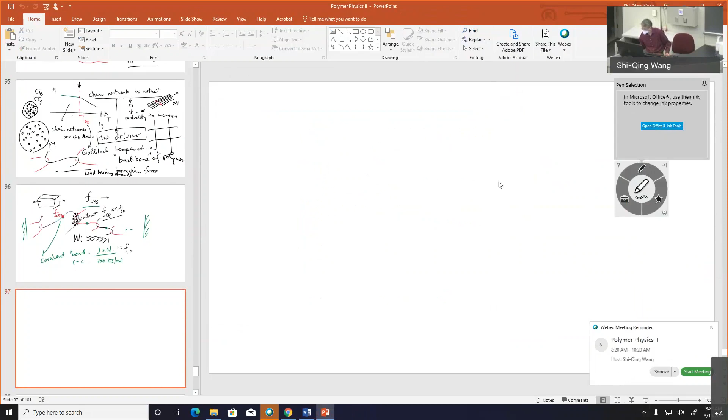Okay, here it comes. Let me review a little bit, or force you to have a sense of this. This is what you do: you grab your sample, you try to draw it at room temperature, which I mimic by bending, and whether you can succeed in achieving that deformation really depends on whether the soldiers, whether the chains inside, understand the command.

And this thing just goes on and on, right? Millions of them. So it looks utterly clear that the only way you can send your message through is if there is something that connects everywhere, over 1 million of such structures.

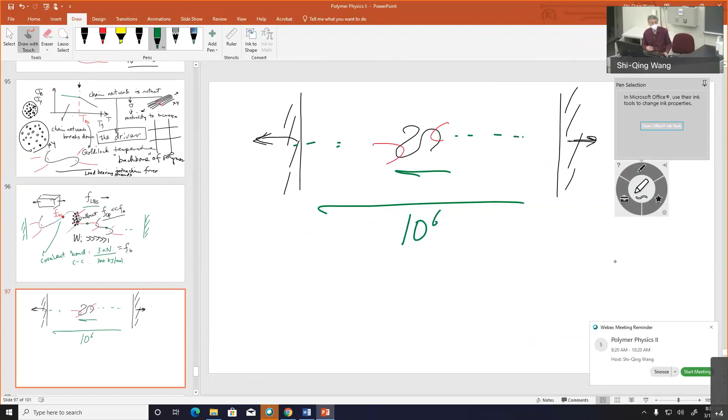So to the zeroth order, that seems to also be the way to think about what delivers the stress. If you really have something that eventually gives you higher mobility, R is mobility, and match the mobility with external rate, you need something that delivers this stress, and that stress presumably is this chain network.

And it's this backbone that can still, it's this backbone that is sending the message. So one way of thinking about this is this backbone is able to displace, and there is the possibility that this backbone, as it moves, it will bring about movement of the surroundings.

And there are millions of them now. They are all connected, not because the chain is several centimeters long, but rather because of uncrossability. They are all frozen, by the way, in this glassy state. So they have no way to escape. They get stuck there.

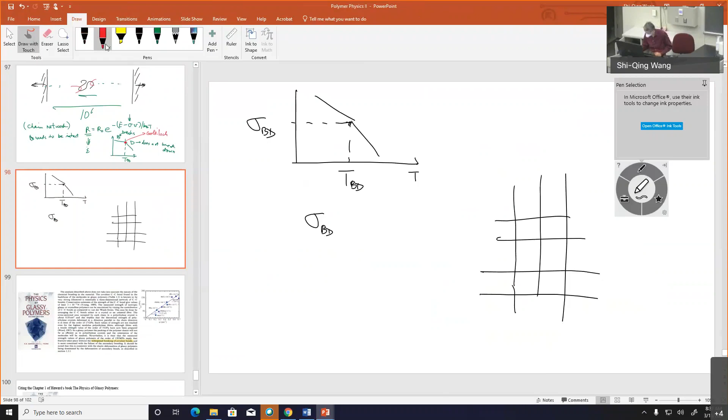And then we just recall what we know from the way we think about rheology. It's a network. It's a network in the sense, this is my network. Then I claim each of this. I use a straight line to describe that strand, but in reality, it's more like a Gaussian chain, right? Because there's no stretching. The chain just happily stays in a Gaussian coil form.

So if this is the network, all I need to ask is the area density. In other words, let me just establish the coordinate for you, x, y, z. If I look head on, in other words, if I look at the x, y plane, then I see these strands coming out to me. All these facing me are the red ones. They're coming out to me. I'm going to count them, how many per unit area, and denote this by this.

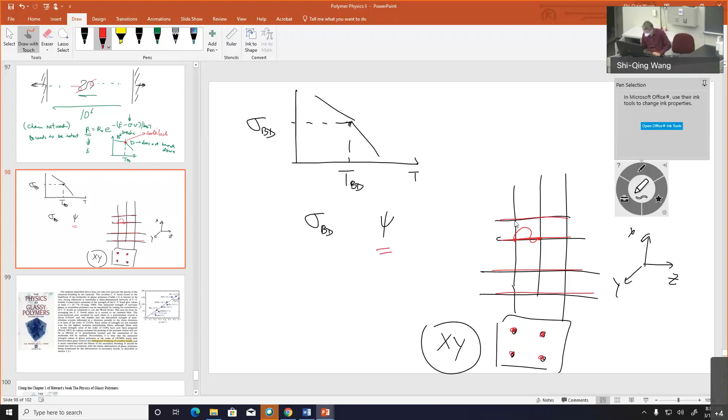Since this concept is established through the idea that you have chains explicitly establish a network through uncrossability, these points, the nature of these junctions, can be regarded as arising from this, right? This point is that point.

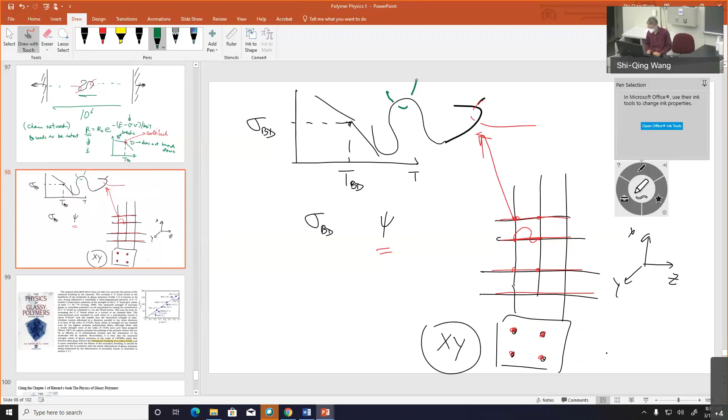And you can argue the only way this can occur is for this chain, changing my color here, is for this chain to fold back and forth so that there could be another one coming to grab me, right? Remember that? So the argument then is that this needs to be long enough for the red chain and the green chain to grab me.

And how long was it? We talked about it. You need to fold several times. I know this part, I just count on you to still remember a little bit, but you can always go back to the recording to find out where they are. And we claim, roughly speaking, maybe it needs to be this long.

How long is that? So in our new language, we will call this load-bearing strands. Then we're really trying to figure out what is this load-bearing strand, how long it is. Well, the minimum, this is the minimum that will give you a load-bearing strand.

Or let me just try to be rigorous. I would say that for this chain, this part of a chain to form, to have the possibility of becoming a load-bearing strand, you need to have a length called LC that we estimated several lectures ago.

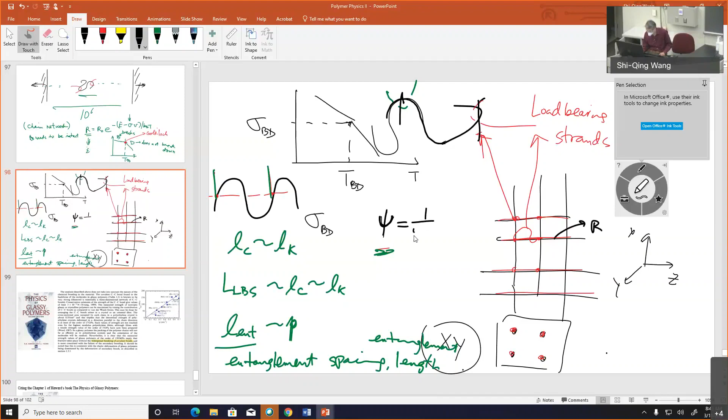We can flip back to the notes from some time ago. You will find out a way to argue about area density of a network that has a strand of R, which is generically given simply by 1 over packing length times R. This is something you can, in principle, go back to the notes early on, and it's surely described in the book as well.

But look how powerful this is. So let me give me any network. I introduce a mesh size, that's R. Now, it's only a question of what this R is. Do you see that point? Are you going to use this one, or are you going to use this one?

Both claim to give you some length scale or mesh size related to the vague word of entanglement, which we sometimes also call uncrossability. But they are not the same. They are not the same.

Which one to choose? Here, recognizing the mechanical importance of this network, perhaps I want to choose this as my network unit, as the building block of my network. I know this is all quite simple mathematics, but quite deep conceptually about choosing. You choose this only because the second one does not give me a vivid picture of how this network will form, because that's just a packing model.

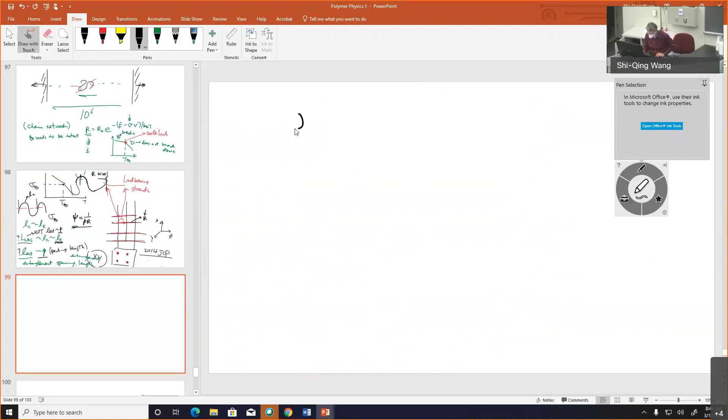turn one more page and continue on the question of what may determine this point. Let's count on our luck, let's speculate. I want to invite you to think about this: this is how many strands are sticking out, sticking out as psi, as 1 over p load-bearing strand. And therefore, it is 1 over p cone length. That's what we indicated.

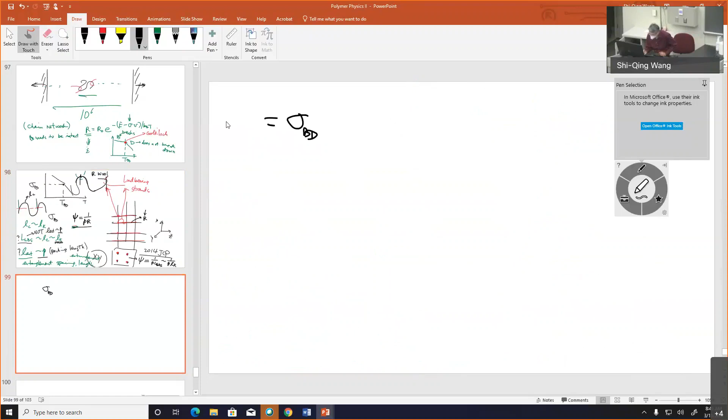So the force that can fight with, or that arises from the drawing, is of course coming from the load-bearing strands. And remember, stress is always force per unit area. So we are talking about force coming from each chain, each load-bearing strand, per unit area.

And what's left is how much force from each strand at the brittle-ductile point. What is that point? What is that point, oh Lord? That's the point the network breaks apart, right?

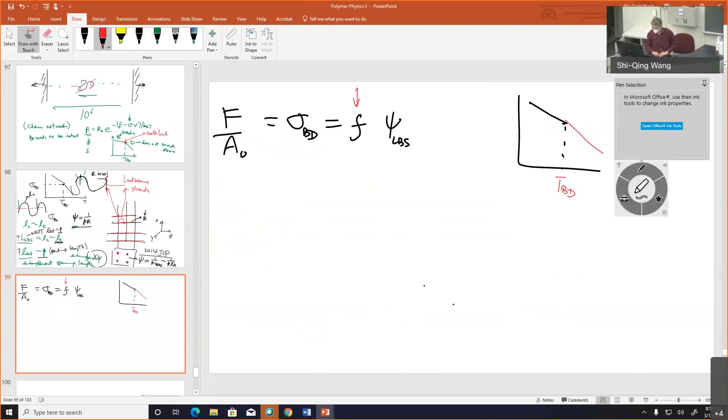So this is the force that's building up so much the network falls apart through what? Through the chains starting to slide at the junction. So let's call that chain pull-out force. CP stands for chain pull-out.

And since all this is happening deeply below glass transition, we are now speaking about the possibility of answering this brittle-ductile transition question for all polymers: polystyrene, PMMA, polycarbonate, PET, everything. Then the hope is that this point occurs sufficiently below TG so that there is some universality - something all different polymers share.

What do they share? Well, how about they all pull out at the same magnitude of force? That's just dreaming, okay, you hope so. In fact, you have no idea, and I have no idea. Nobody can predict. But so the logic goes both ways - you propose such a thing and see if it works.

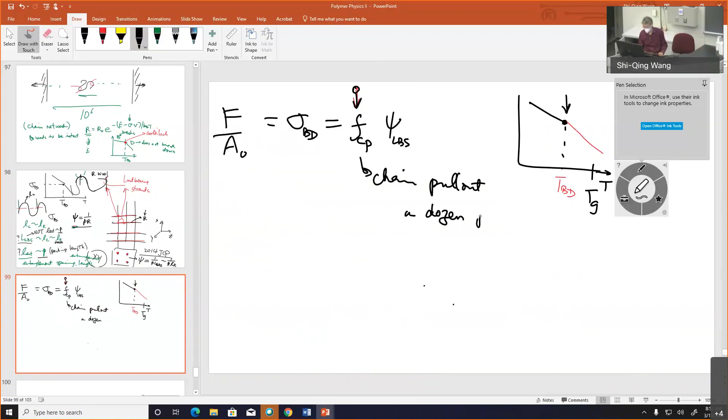When I say it works, it turns out there are just about a dozen polymers that Vincent - who has really done some fantastic experimental work - in the 60s and 70s collected a set of data for sigma BD for these dozen polymers. Not only that, he plotted this data with what is inspiring him to think about the structure of your polymer.

And the way he did it, so this is the XY plane. The way he did it is he visualized all the bonds are passing through.

Oh, I meant to change the color. It's just so slow, the computer. All the bonds are going through. Oh gosh, this is not the right color. So they're all coming through.

So if I look at my XY plane, I have all the segments coming through. All the segments. No network picture in mind, okay? Just all the segments. They're going to stick out when I make a plane cutting through. And you know...

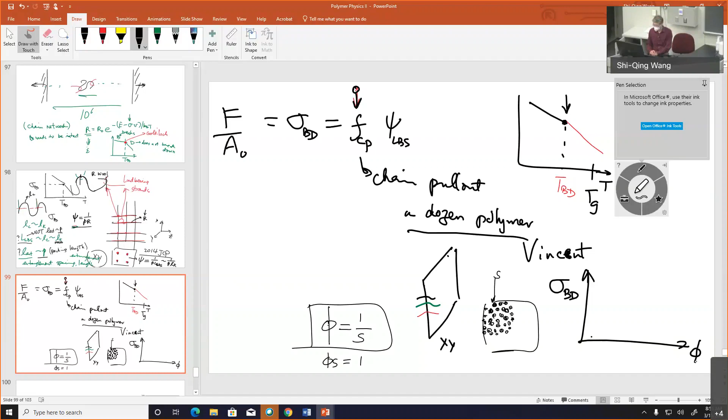And this is a famous plot. We should just honor Vincent, call it a Vincent Plot. Let's go there. This is the Vincent plot on the left, upper left.

Of course, there's something you don't recognize because I have plotted... I have plotted against our parameter, which we just introduced, right? And...

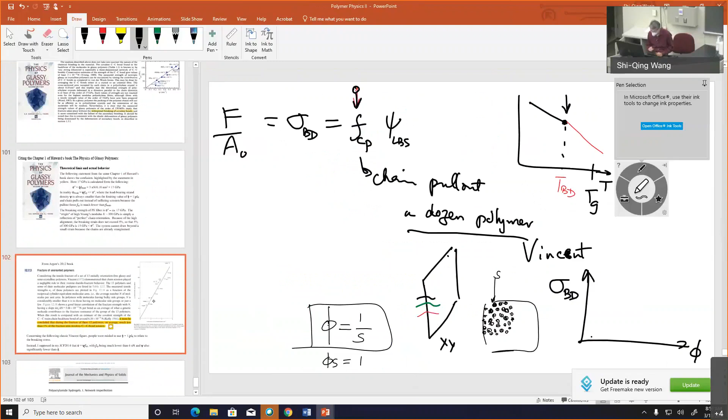Vincent, let me show you the plot. Here's the Vincent plot. Vincent plotted the number of backbone bonds per unit area, which is what I just said, phi. And look, this is the originality now. Look at what you find. It's nearly a straight line.

Because each of the bonds is going through my area. The only reason I'm motivated to plot this way is to think, actually, that all the chains break at the point when this breaks, when this polystyrene breaks. And then we'll explain the whole nine yards of why this is a confusion. But that was the motivation.

And this implies that... well, except we're in trouble, and which we'll explain in great detail. Except we're in trouble. Why? If this notion is correct, then...

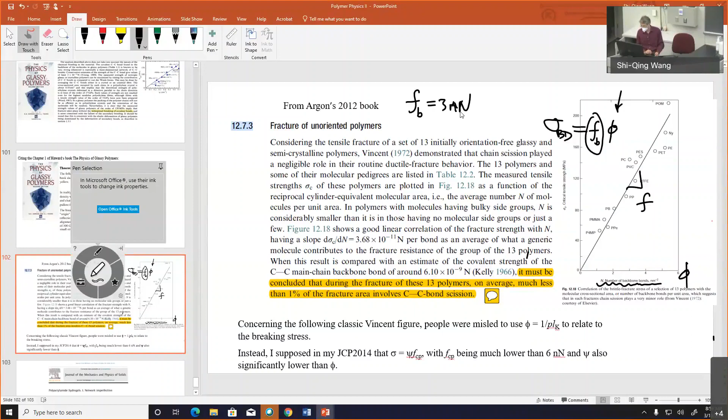You know what? This... trying to translate. Let's say, where is my polyethylene? Polyethylene is here, about 10^6.

This polyethylene, it reads this value, is about 160 or 150 megapascals. Okay, it's here, it's reading. I know it's a little small. It says 160. Or if you don't like it, you can get to my reproduced plot.

Polyethylene is this point. It is about 150, 160 megapascals. Okay, that's what you find in your experiment. All right? If you plug in this number and the number for polyethylene of this area density, okay, you would find this number for polyethylene would be, instead of 160 megapascals, would be 16 gigapascals. Two orders of magnitude higher.

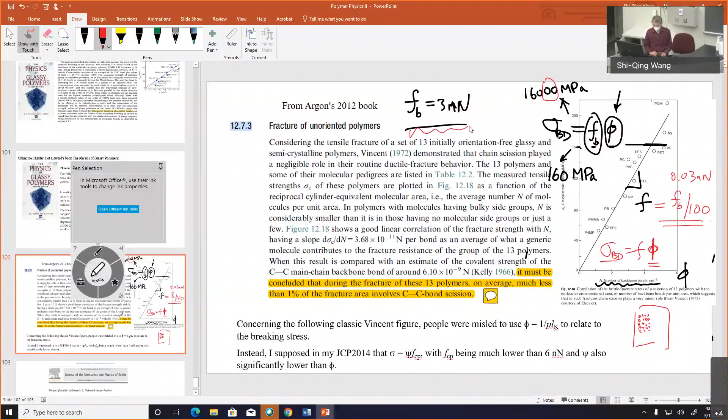But let me first come to a more interesting point, which is when we analyze this according to our network picture... let me go back a few slides. Get rid of this.

In the limit that this is constant, then of course your stress at that point of breaking, the so-called brittle-ductile transition, will be proportional to this density, by definition, if this is a constant at the point of breaking for different polymers. And as I indicated, this, according to the previous formula, by plugging in R...

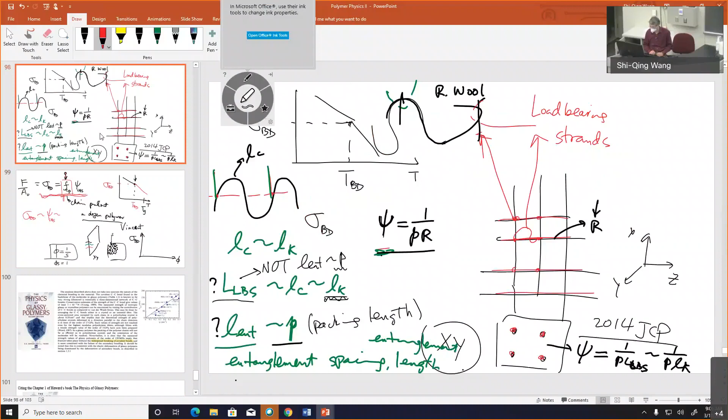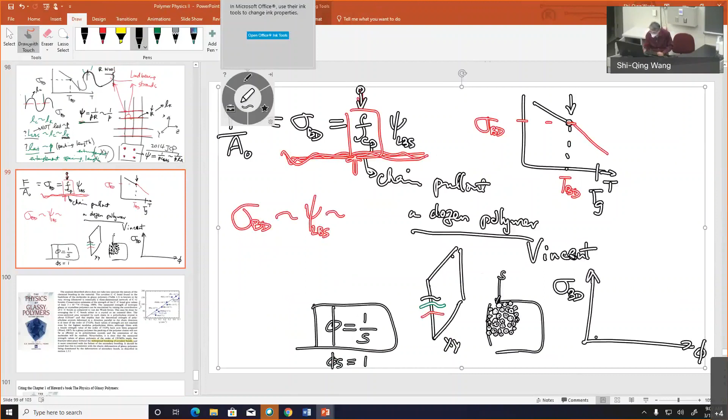By plugging in R as proportional to Kuhn length, then this is nothing but proportional to P, or 1 over P, because Kuhn length is an independent length. So what I want to say is that we can expect my stress to be 1 over P, because when you look at a dozen polymers, what differentiates one from another is P. It's only P.

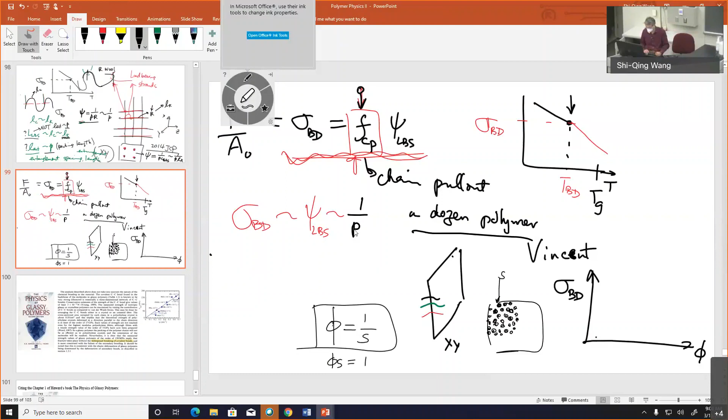Well, when I say that, I'm making a small insight here. The Kuhn lengths are not that different between the polymers. They are all flexible polymers, linear flexible polymers. So let's go back to the plot here again, the Vincent plot.

Vincent found this linear dependence, implying the stress is linear in phi, and therefore linear in 1 over S. And if you recall, S is nothing but P times Kuhn length.

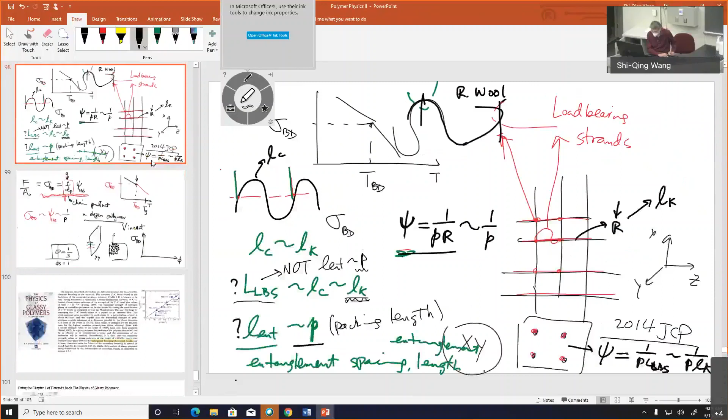Therefore, amazingly, this network density, area density, has the same dependence on P as this phi does. And that's why in either plot, you will have a linear plot.

The rest is also remarkable. If you plot this stress as a function of entanglement network density, which says it should be 1 over P, the R is entanglement length, then it's 1 over P squared, because the entanglement length is proportional to P as well.

So if you somehow claim, I know all this is just entanglement network, entanglement network has the area density of this, and you make a plot like that, look how ugly that plot is. It does not correlate properly or linearly.

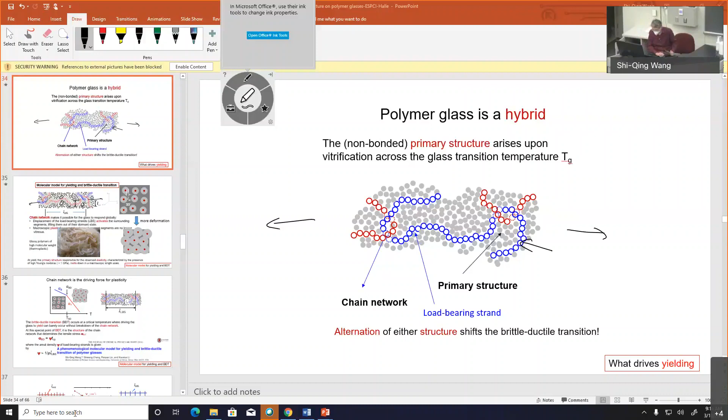Then this condition of failure will be reached across this 10 million layers. Maybe the 100th layer will reach that condition first, and that's enough, because that's the place that will break. That's why you see this thing breaking so sharply.

In other words, once I have this breaking, what happened to the rest? Totally intact—by definition, nothing happened. They remain as strong. So that's the horse race we learned from rheology already, but there's 10 million that are going through the same thing. Let's have a race, let's see who wins.

But that concept, of course, is highly difficult—this horse race concept to appreciate. But if you appreciate that concept a little more, perhaps you can forget about fracture mechanics, because that supposedly is teaching you how to think about failure and breaking. I'm half joking here now. Okay, any questions?

So this is a nicely prepared slide of my talk, so you can see what I was implying about drawing these gray circles. They are just cylinders wrapping around each backbone, each load-bearing strand. I'm indicating when the temperature is above the BDT, brittle-ductile transition point, I can always cause this mobility to grow until there is enough mobility everywhere as the gray circles start to overlap. And below that, you're just in that frozen state before the network falls apart. This state is the remainder of my polymer—in other words, it's unable to reach a global activation, represented by the darkest shades here.

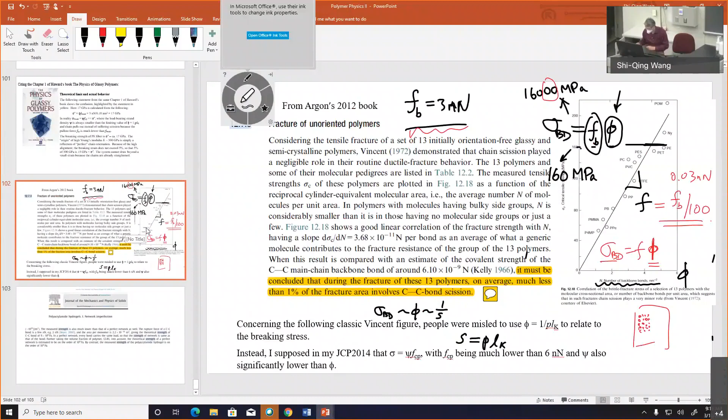If you ask the bottom line about what happens, then it's quite simple. The question you're asking is really, for example in this picture here, for that blue chain. Ask yourself what's the right word to say. The challenge is this: you've got this backbone, which is the blue chain—it will break if you reach 3 nanonewtons. On the other hand, this blue chain is wrapped around with the red chain, which is our junctions. If it takes much less force than 3 nanonewtons to pull out, then by definition it will pull out instead of breaking. Yeah, that's obvious, that's completely trivial. Okay, now the rest is what I have not indicated in detail.

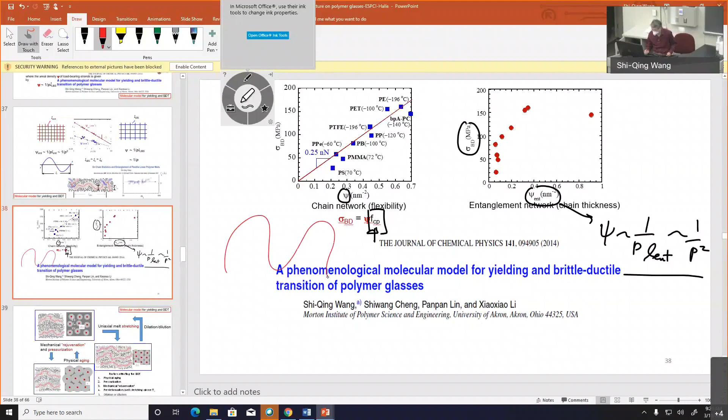That's this plot—we replotted Vincent's plot. We used our parameter of the area density. Well, of course we don't know exactly how long our area density is. In other words, we know how to estimate from here to here—that's LC, as I indicated. So it comes back to the plane 3 times.

We know that, but just the fact you have 2 hairpins does not mean there will be a chain that's threading through. Therefore, the only thing one can argue is that you will have a load-bearing strand that is structurally proportional to LC, but it could be 10 times larger than LC, could be 5 times larger than LC. We don't have any theoretical result on that—that's the shameful, embarrassing thing I have to say. To figure this out, in theory, it should be doable. It's just that you have all the Gaussian chains inserted into each other.

At least at some level, using some criteria, it should be possible to figure out what this is. I have teased this with theoreticians in the world about it. Give me an estimate of this.

What you need to recognize is that to determine this, in principle, is a multi-chain problem. By definition, at least it is a double chain binary problem. And what I argued about, LC, which is what Richard Wool argued about, is a single chain property.

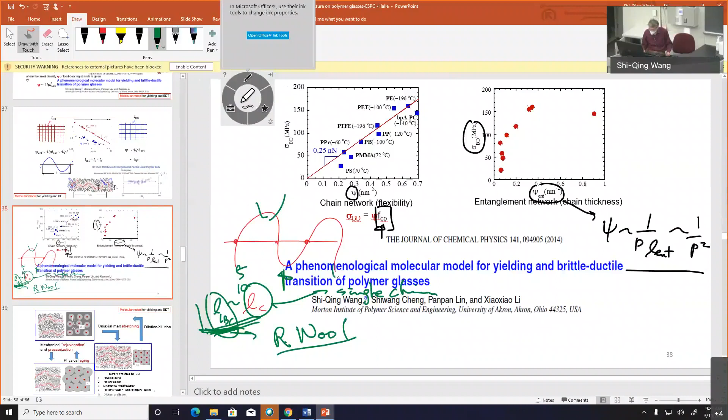In other words, let me use this representation. If I need to flip back this many times in order for another chain to find another pair, then this is my load-bearing strand, see? And I don't know how many times I need to fall back and forth before another chain gets hold of it and forms a junction with me.

So in this plot, I just made some very arbitrary guess of what that length should be. And once you made that arbitrary guess, I find this slope is about one-tenth of the breaking force.

There are other arguments, way beyond the scope of our lecture, that can convince me that the breaking is not due to chain scission. Let me just close the argument to the point of answering. You can read it—I have a book chapter where I argued in detail why this breaking is not chain scission. However, this is not to be confused with the fact that chain scission could also occur.

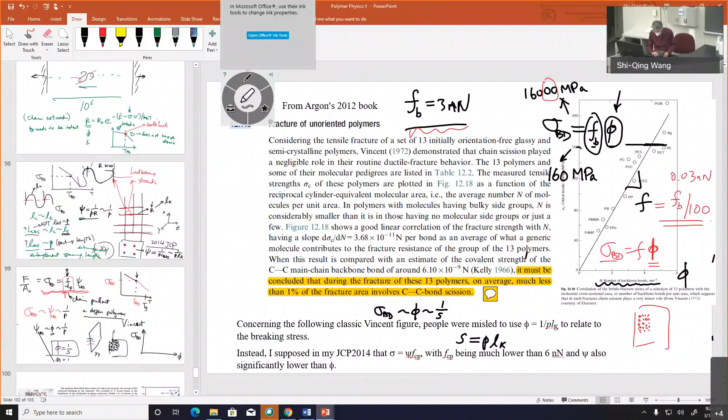In fact, our more recent computer simulations allow me to have this insight. Computer simulation is something I briefly mentioned—no, sorry, not in this class, previously. Computer simulation allows me to say that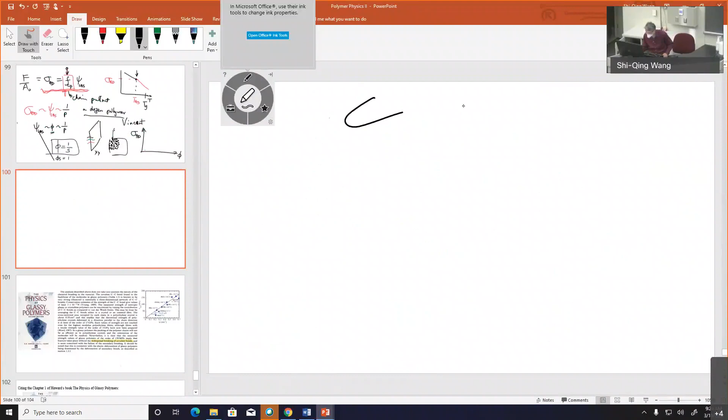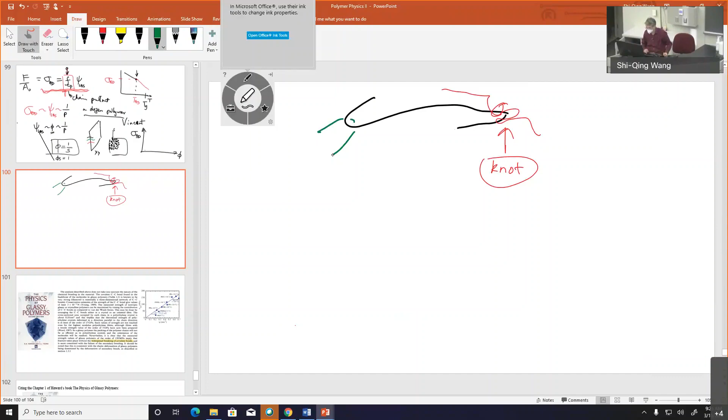there are cases where the other chain really comes here and forms—I'm not going to draw it properly—a knot. You can understand it in the way of knots. In other words, not a simple, uncrossable tangle, but one that's really wrapped up and can tighten, and that will prevent chain section, chain pullout.

In that case, if you have a couple of such cases where this thing is wrapped, then this chain breaking could occur—will occur. But these are statistically small events. They are not the dominant cause.

So with that, I'm closing my logic here. There could be a few, and computer simulation tells us why there could be a few, because there are a few that are wrapped with each other much more heavily than this simple, smooth hairpin kind of thing that can really slide on.

There could be ones that—you know how you tie your shoes—there could be ones that are much tighter, where the chain has no escape until you build a force of 3 nanonewtons. By that time, of course, I may as well just give in and break the chain. Get it? Right, so that's the point.

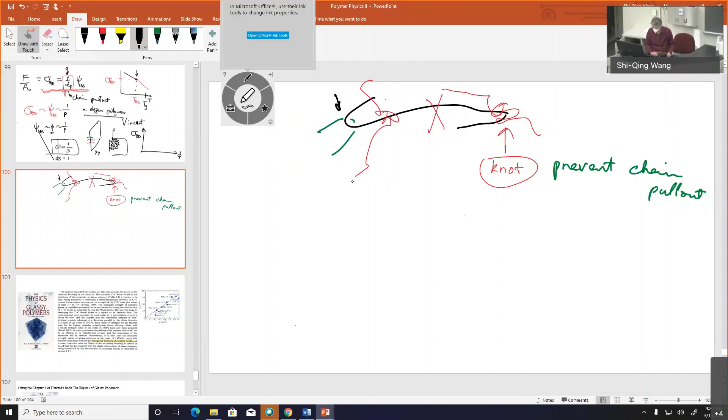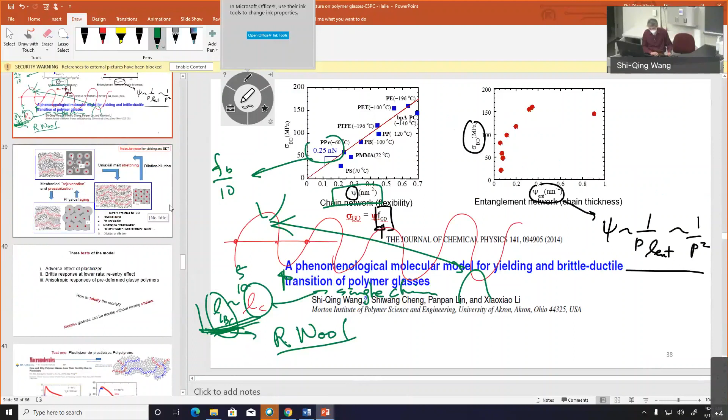Thank you. So we touched a bunch of deep points, so we're reaching a good point to summarize before I move on. In any event, I will skip a lot of the summary, perhaps just give you this one, so that you will see this is something quite familiar.

When I say that, I mean the following: remember the 5 factors I indicated for you before? 5 factors that can move the brittle-ductile transition point away, higher and lower, in temperature.

This is where this whole system, this whole picture, has two sides. On one side, you have the driver, which is the backbone, the chain network, whose structure has already been analyzed. It's not entanglement structure, it's something new—let's call it Richard Wool structure, in honor of him. That's the driver—that's where we ask, who is delivering the stress, who is delivering the mobility, in the name of Eyring?

The other side is: how difficult is this job of delivering? In fact, that part is quite—naively, you can just do it this way. Naively. It's not just so simple in that sense. Where do I have it?

For just a second, where do I have it? Here. You can go back to this original story. You can naively say exactly this.

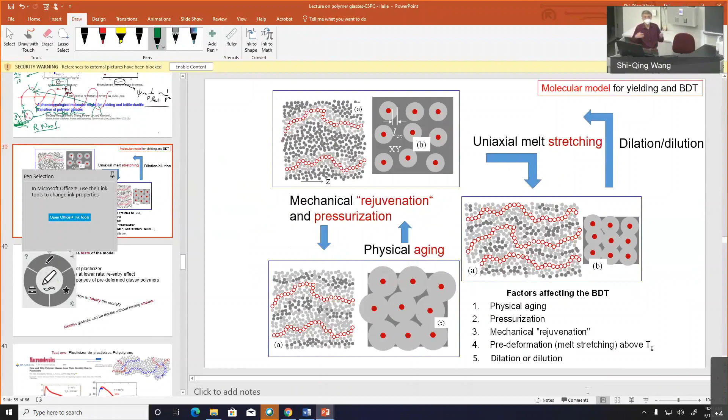By what? By, for example, melt stretching. In other words, if you have a ductile polycarbonate, you age it so that ductile polycarbonate becomes brittle. Well, the only way to overcome that is I take my polycarbonate and first melt stretch it. Then even when you age your polycarbonate, it will still remain ductile, because I have improved my network. So even though the soldiers are more dormant, you still will be able to wake them up.

So this is quite obvious. The physical aging just makes the samples more trapped. So I used the fact that a previously successful activation is no longer successful with aging. So we're representing it this way—in other words, there's just not enough mobility created.

And rejuvenation—remember you saw that magician's thing, that you pass through the two-roll mill, and polystyrene becomes ductile. Well, that actually rearranged all the monomers. In fact, all the monomers are almost half awake already, so it's very easy to wake them up. In other words, you have changed the energy barrier with the mechanical rejuvenation. So that interprets why this is happening.

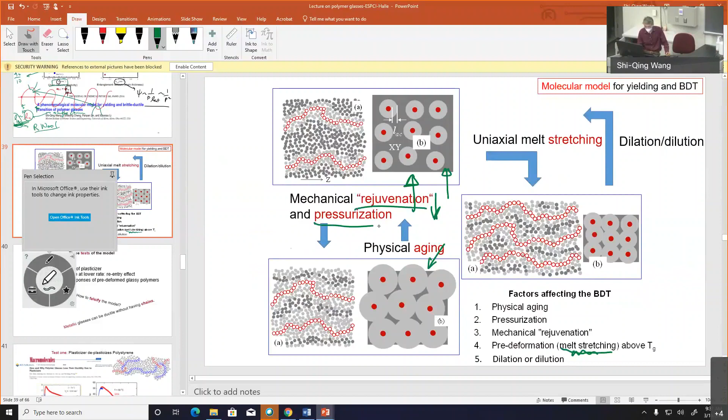And what about pressurization? That's the third thing that has nothing to do with chain network. The pressurization—a simple argument—is you smash it, so in some sense the sample is further densified. But it's not a thermodynamic effect in the sense that how sleepy the soldiers are is perhaps less affected by pressure, not sufficiently affected by pressure.

But then there is the second part of the effect of pressure: it makes chain pull-out harder to occur. So that I can improve that pull-out force and therefore accomplish the job of activation before chain pull-out takes place. So that's my interpretation—very hand-waving, but totally satisfying to me, without getting into any complications, to appreciate what is the effect of pressurization, which makes polystyrene at room temperature ductile under hydrostatic pressurization.

And the rest is also very straightforward. Melt stretching brings the network in the XY direction—you're drawing in the Z direction, much closer. By definition, because when you melt stretch, your cross-sectional area shrinks, so in the affine deformation limit all the backbone collapses into a smaller cross-sectional area. And therefore your job to activate becomes easier.

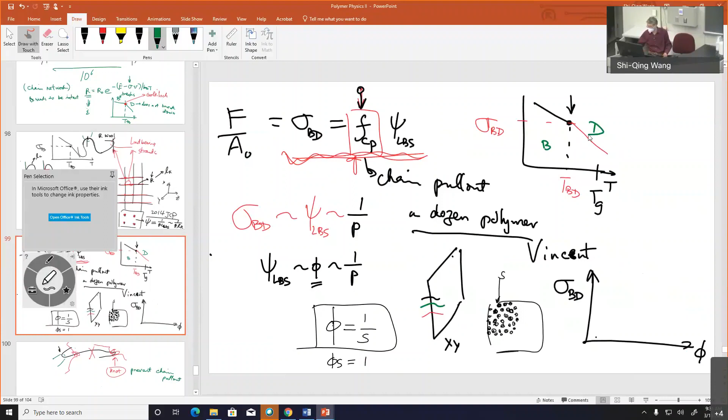And all I want to say, perhaps at the end, is that you cannot design a theory that only explains why polymer can yield without confronting the question of why it stops yielding, when it loses the ability to yield. So the very same theory has to explain both. You cannot have a theory like Eyring and just be content that I can explain why polymer can draw and yield.

Dr. Wang, I have a question.

What do you mean by the chain network needs to be robust? Does it mean it needs to suffer some stress before it activates its neighboring chains, right? It needs to be robust enough to suffer a certain stress before activating. That's right—yes. Or rather, basically as you draw, you try to avoid your force building to the level of pull-out. That's another way of saying it.

And when you have a denser amount of chains, of course you achieve that before the tension builds enough to have chain pull-out. So this is all logically totally consistent.

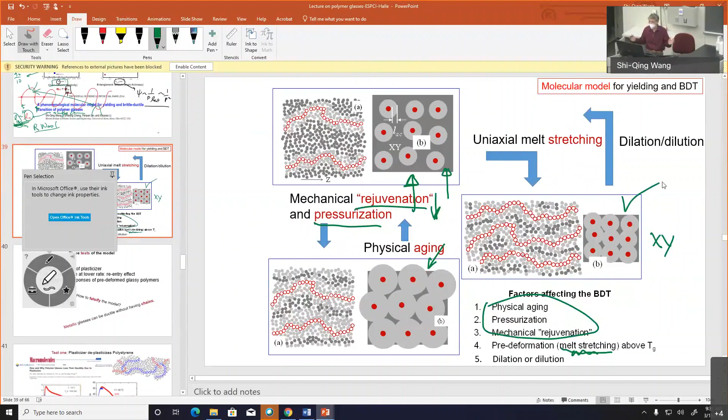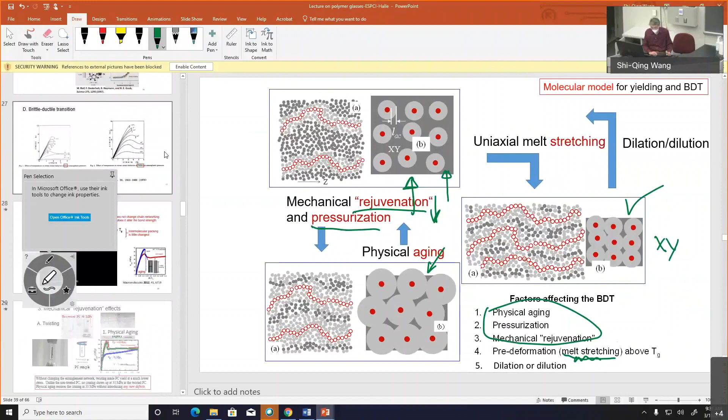One of the things I'm proud of being able to explain is this famous phenomenology, that polystyrene or PMMA, which is very brittle, very very brittle, if you put it on compression, look at what this movie shows. If I don't tell you what it is, you may think that was honey or water.

So how did people understand this? You see, in compression, polystyrene is ductile. Well known. You may say, oh God, Eyring's idea can explain this. Well, there are some papers we wrote that you can take a closer look at if you're interested, and to appreciate, indeed, compression is a very different animal than extension. Very, very different. I don't have time to go into the details of it.

But the simple way people have explained this difference between extension and compression was that, through some big words, in extension there's something called dilational stress. In other words, when I extend, I always try to move things apart. When I compress, I don't move them apart.

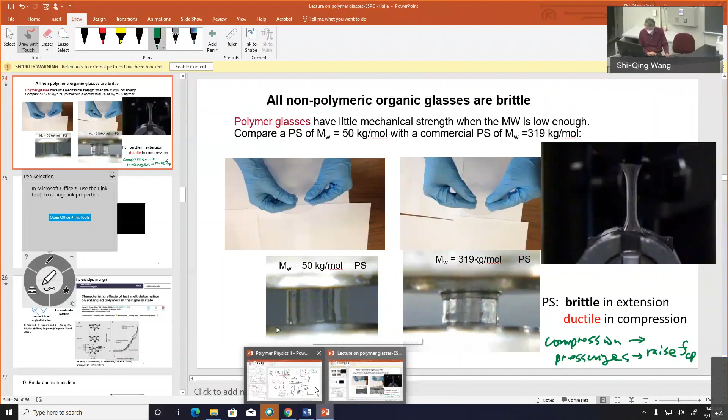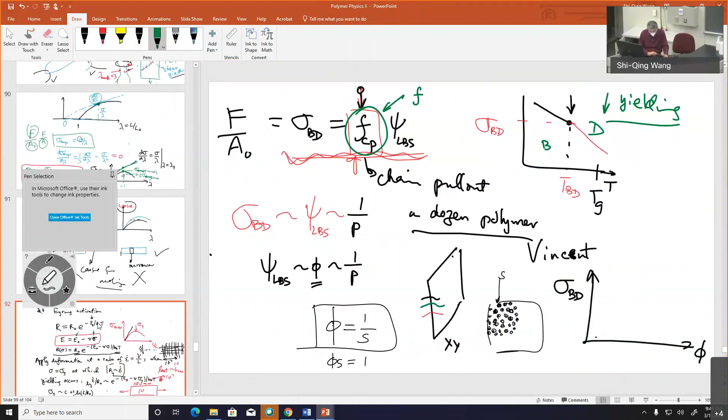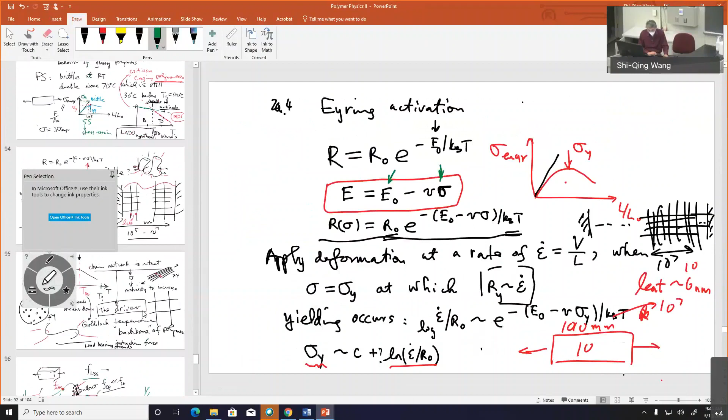Okay, so this really completes the discussion on only a tiny part—well, not tiny—just the glassy part of it. So I'm trying to find my titles. We're in part 2, and we went through several parts. In part 2, the A part is only on glassy polymer, and there were several items in this A part.

When we come back next class, we'll talk about the B part, which is semi-crystalline polymer. Again, something I could never speak about two years ago, because we didn't dive into the subject at that time. So we'll come back and talk about the B part, semi-crystalline polymer.

And next week, we'll have a chance to talk about, in either case, solid polymers undergoing fracture in the presence of cracks. So that belongs to fracture mechanics. But before that, let me bring you up to speed on the topic we touched today.

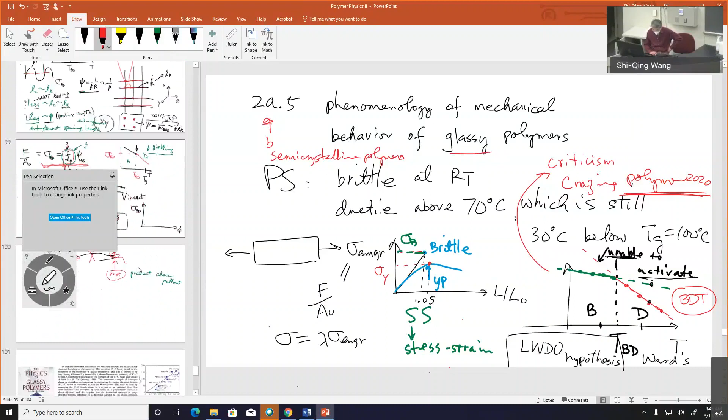So I'm going to go into some detail about it. Keep in mind, let me use this page to do it. Remember that our several hundred billion pounds of polymers—we use them all because they have adequate mechanical properties. We want to improve it so that we can use less, perhaps. But that's all it's about.

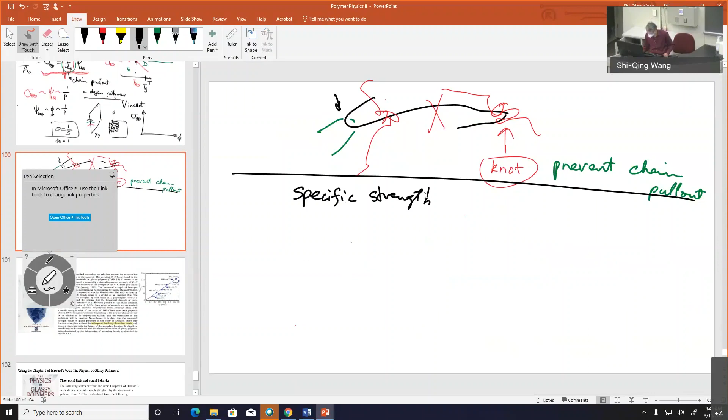Because of that, I mentioned the word specific strength, which is just a word—I don't think I invented it—but basically you can indicate that as mechanical strength. I will define it: divided by density. How about that? That would be my specific strength.

And practically, you can think about it much more easily. You get a bar of a certain size. You ask, what is the weight of this? For example, if I use the same bar—so this is plastic—I have the same bar, same size, of steel. Of course, I have a rather different weight, by a factor of 8, for the same bar.

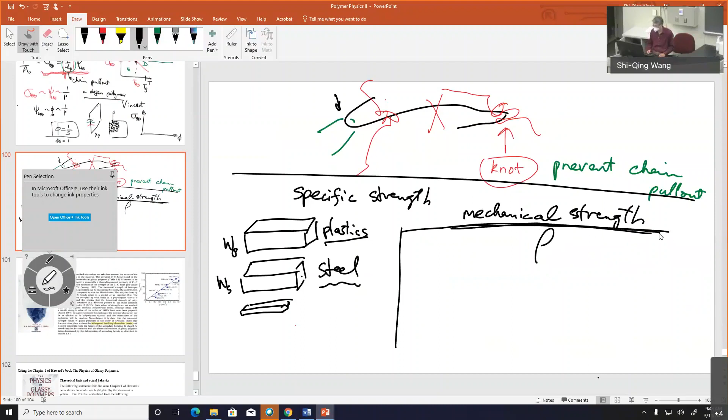And of course, for the performance you want, this may overperform. But if I don't care about the size—overperform means for your steel, you can use a much smaller piece—but if I don't care about the size, then I would say, oh, I will use my plastic because it gives me enough mechanical properties. So in any case, I don't need to go into details other than to indicate to you that mechanical strength is a top question. And you may even ask, do you need fracture mechanics to answer that question?

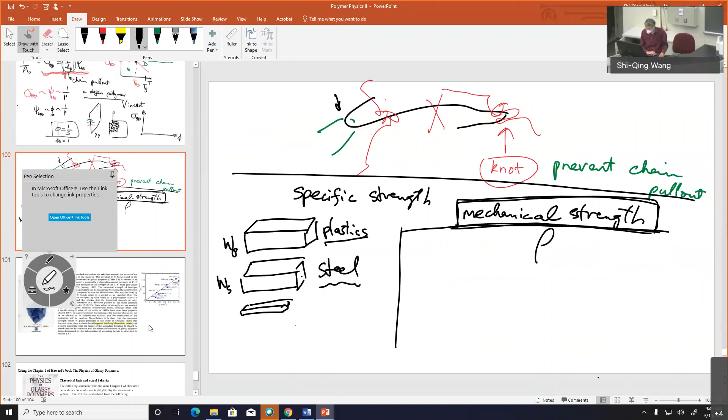So before we go too far, let's deal with what was available in the literature. With that, I want to share with you this book. I know it's supposedly out of date because it was—I can't remember, 6 or 7—it was more than 20 years old now.

I don't think we made a lot more progress at the chain level, apart from what I just described today. But let's go back to really, this is the beginning chapter statement. Let me bring a few things to your attention, because it sets the framework, sets the reference for you. Of course, this is a plot you're familiar with, but we'll see where we need it. So this is a beginning statement in the book that really needs to be updated, of course. But let's go with it.

So the first thing is what I already shared with you: the strength of a carbon-carbon bond is 3 nanonewtons. Okay, that's known. Next, he's saying let me consider a case where my chains could all pack. A nice way the chains will all pack is when they undergo crystallization and form a lamella.

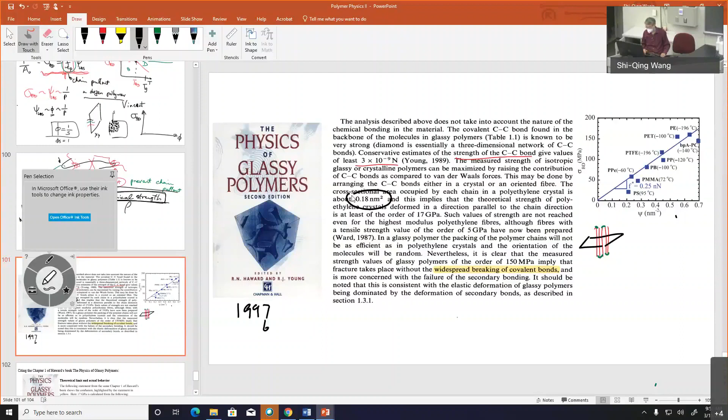I know you will learn about it in more detail later. So if you like, they're kind of connected here, connected here, connected here. He's saying the cross-section of the bonds coming out by area has a certain density for polyethylene. How do we figure this out in our language? Remember, looking at it, all the chains are like chopsticks sticking out to you.

All the chains are sticking out to you like chopsticks. Therefore, the density is just what we went through, 1 over S. S is the little cross-section of your chain segment. You plug in your number—this is about 1.7 angstroms. You're plugging this as 1 nanometer, which is about right.

This is exactly 0.17 nanometer squared. He said it's 0.18, I say 0.17. That's because I may have my Kuhn length being 1.1. Well, basically, that's it.

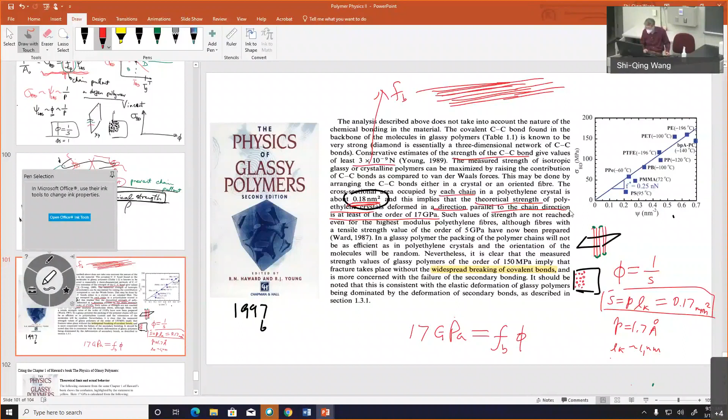And then he moves on and says, indeed, fibers could achieve 5, close now, okay, close. This is the magic. The fibers can indeed be as strong as steel.

Because you are in this condition, all the covalent bonds are fully utilized. No waste, because you don't have chains coming back and forth, wasting all your cross-sectional area without load bearing.

So this is the inside of fiber. It's a tremendous innovation, and they all did this. Well, you may say the spider did that too, the silkworm did that too. But they all did that before there was any real appreciation at this theoretical level.

At least, yeah, okay. So let's read patiently the rest of it. It says, in a glassy polymer, the packing of the chains will not be as efficient as crystals. Of course, in fact, not at all. It's a coil, right? So the orientation is random. We, of course, acknowledge that.